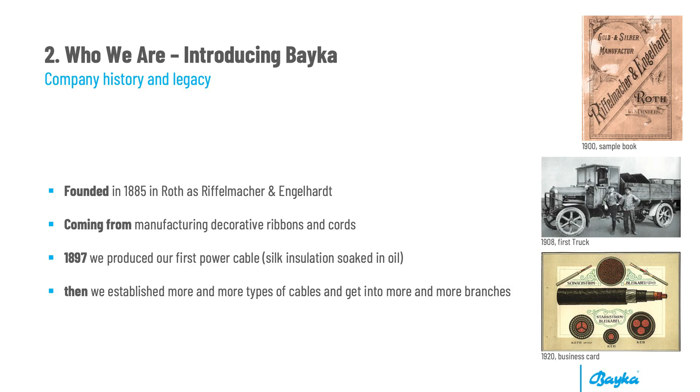We are more than just a cable manufacturer. We provide a wide portfolio of cable solutions, from standard power and communication cables to highly specialized designs tailored to the most demanding environments. Our cables are the invisible backbone of many industries, from powering urban infrastructures and renewable energy projects to enabling safe railway operations and ensuring reliable data communication.

In 2024, we were nominated by Deutsche Bahn AG as one of the top 3 suppliers in the infrastructure sector. We prevailed against 22,000 other suppliers for Deutsche Bahn.

In which markets are we active? What trends are driven there, and why do these markets need us? Energy utilities: without reliable cables, the energy transition cannot happen. Railways and transport: every safe train journey depends on kilometers of reliable cables, often hidden beneath the tracks. Infrastructure and industry: built to last for decades with our cables. Data and communications: enabling the digital era through secure and high-speed cable solutions.

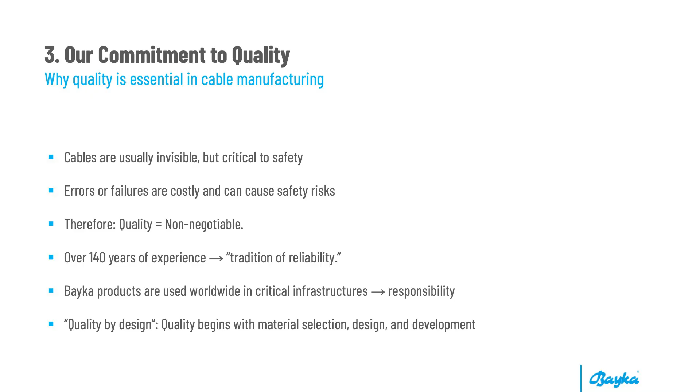We are DIN EN ISO 9001, 14001, and 50001 certified. Furthermore, Bayka employees adhere to ISO 45001, and we fulfill a mass of additional standards and regulations on the customer side.

We don't just test at the end of production. Quality assurance at Bayka is a continuous process, starting from incoming goods inspection through in-line monitoring during production to extensive final testing. But ensuring quality does not stop with standards and processes, it requires rigorous testing, and this is where modern equipment such as Memmert precision devices comes into play.

A cable is only as good as the conditions it can withstand, and each year we perform thousands of hours of testing to ensure compliance and durability. Every test method shows that cable quality is not just claimed but proven.

Cables have a lifetime of more than 30 years in some cases. Temperature is the biggest driver of material aging. Thermal aging tests are the backbone of lifetime prediction for cable, and Memmert devices make these tests repeatable and trustworthy. Memmert stands for absolute reliability and even temperature distribution. Some ovens have been running since 1988 at Bayka without any failures, proof of precision and durability.

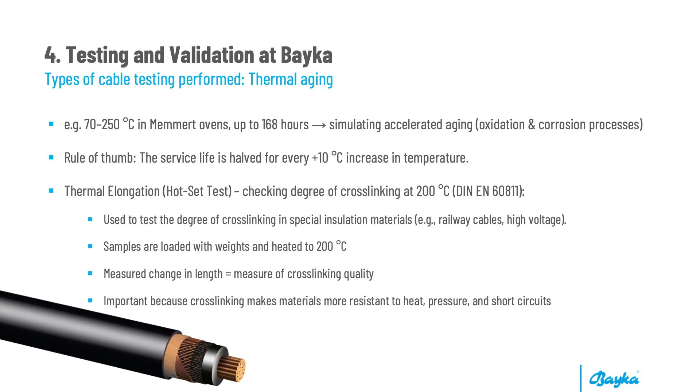Cables are often exposed to moisture fluctuations and microorganisms for decades, for example in tunnels, in the ground, or in buildings. Humidity and climate resistance tests ensure that cables remain functional and safe, even in the most challenging environments, with Memmert technology safeguarding the process. Precise temperature and humidity control and high repeatability of tests are very important. Without Memmert, such precise control of service life would not be possible.

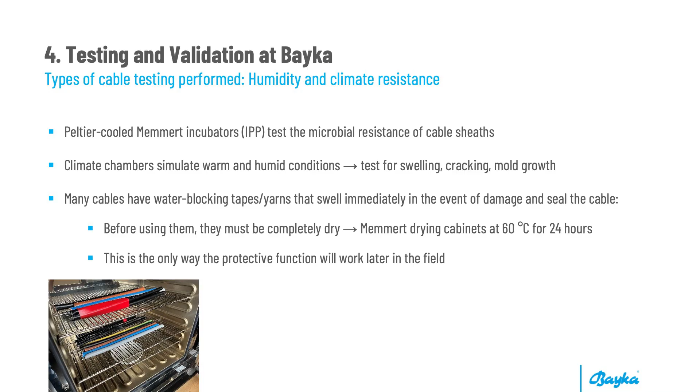During operation, cables are exposed not only to heat and moisture, but also to mechanical stress and electrical strain. Mechanical and electrical tests prove that Bayka cables are not just safe in theory, but robust in real-world applications, backed by reliable test equipment from Memmert. Heating and climate chambers provide stable test conditions for many of these tests. They ensure standard compliant results and facilitate certification.

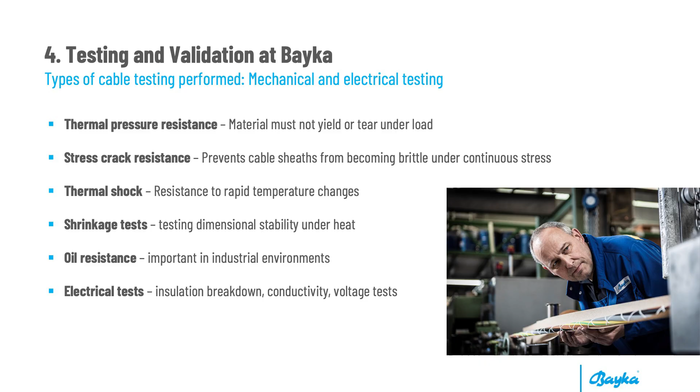At Bayka, testing is not a single step at the end of production. It's part of the entire product lifecycle, from the very first material samples through prototype development to final certification and release. Testing ensures our product meets the highest safety and performance standards. This integrated approach not only accelerates innovation, but also reduces risk and ensures that every cable leaving our factory can be trusted in its critical application, whether in energy infrastructure or communication networks.

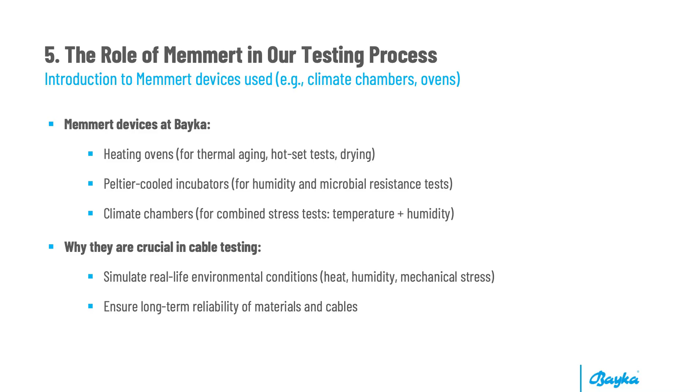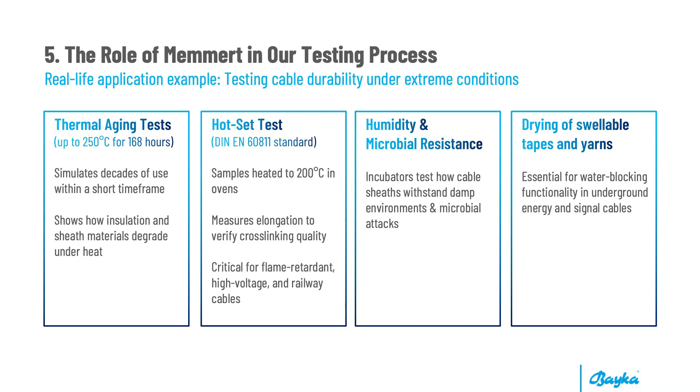Memmert devices like heating ovens, incubators, and climate chambers are integrated across R&D, quality assurance, and production testing. They are not just supportive, but essential in Bayka's testing workflow. These examples prove that Memmert devices enable Bayka to replicate real-world stress scenarios in a controlled, standardized way.

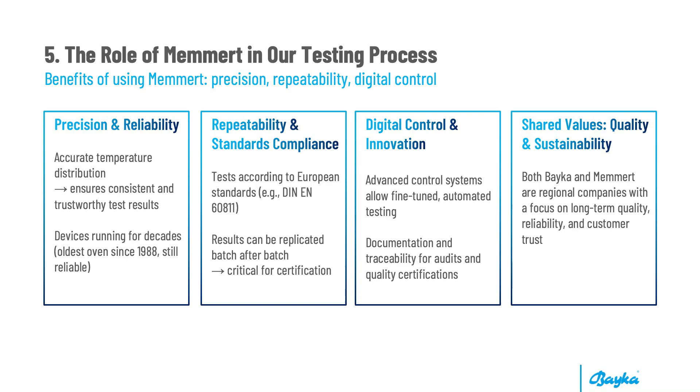Here you see some of the uses of the Memmert items in precision and repeatable digital control. By using modern equipment such as Memmert's climate chambers and ovens, we significantly improve both efficiency and reliability. Automated test cycles and digital controls reduce manual effort, while precise temperature and humidity control ensures consistent, reproducible results. This allows us to detect weakness earlier, shorten development cycles, and ultimately bring robust, reliable products to market faster.

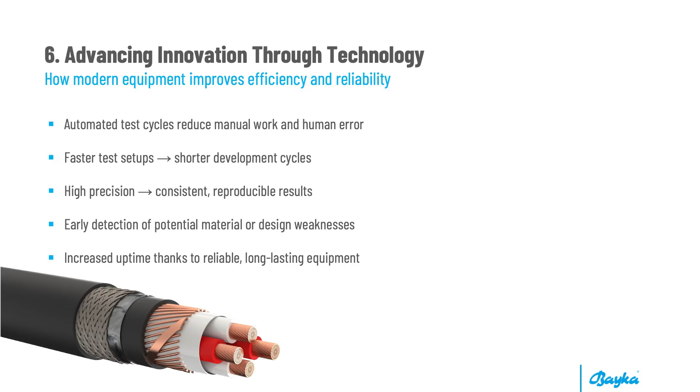Testing is not just about running experiments, it's about data. With modern equipment, every test result is logged and integrated into our quality assurance processes. This ensures full traceability from raw materials to finished cables. It also provides valuable feedback for our R&D teams, enabling continuous improvement. At the same time, it supports compliance with industry standards and customer-specific requirements, strengthening our position as a trusted supplier.

Innovation also means responsibility. By ensuring long-lasting product quality through testing, we help reduce the need for replacements and save resources. At the same time, Memmert's energy-efficient devices contribute to reducing our carbon footprint. Transparent and reliable test results build customer confidence, while our regional partnerships highlight Bayka's commitment to sustainability and long-term responsibility.

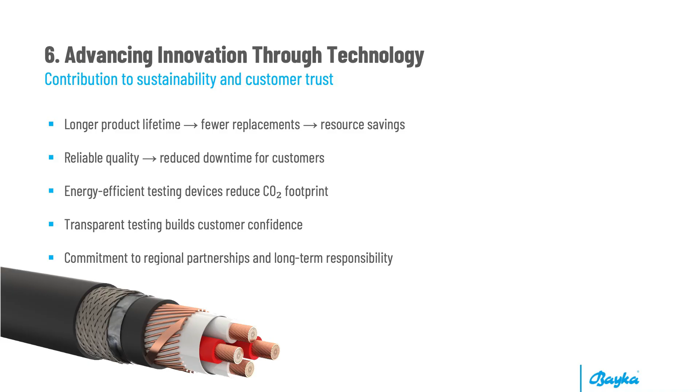To summarize, Bayka is a company where tradition meets innovation, delivering high-performance cable solutions for energy, railways, infrastructure, and communication networks. Our strong commitment to quality is the foundation of everything we do. Every product is rigorously tested, validated, and certified. With Memmert's advanced testing equipment, we ensure precision, reliability, and efficiency, enabling us to continuously improve and innovate. Testing is not just a technical step. It is the key to building sustainability and long-term customer trust. Bayka is ready to power the future, and through our partnership with trusted technology providers like Memmert, we will continue to deliver reliable solutions for tomorrow's challenges.

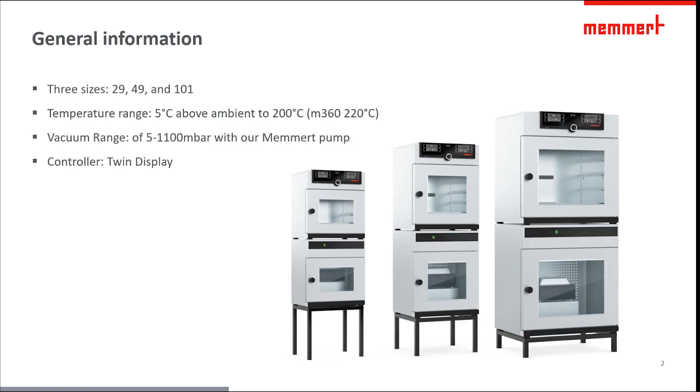The unit, as you see in the image, has our top section as the vacuum oven, followed by our pump module, and the pump sits inside, which allows for a bit more of a quiet mode when using the unit, and then the stand.

Beautiful vacuum oven technology. Our speed-controlled vacuum pump, which is optional, the customer can use, or they can use their own pump if needed. Our pump will allow the customer to save up to 70% in energy. Separately adjustable, all-around heated thermos shelves, which are very unique to our unit.

Internally, the air is actually not heated in our vacuum pump, that's used just for the vacuum. The heat comes from the surface of our shelves, and it's uniform all around the shelf. With our T5 option, you can introduce alternative gases and fresh air to enhance the drying process inside the chamber.

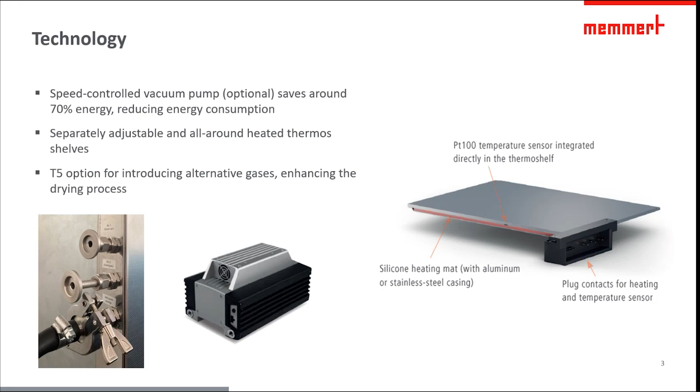Applications: bubble-free fusing and curing of potting compounds, crack-free drying of potting compounds, oxidation-free storage for maintaining a pressure of 5 MBAR and preventing oxygen contact. And lastly, which is the most popular, gentle drying of electronic components without risk of damage through high temperature.

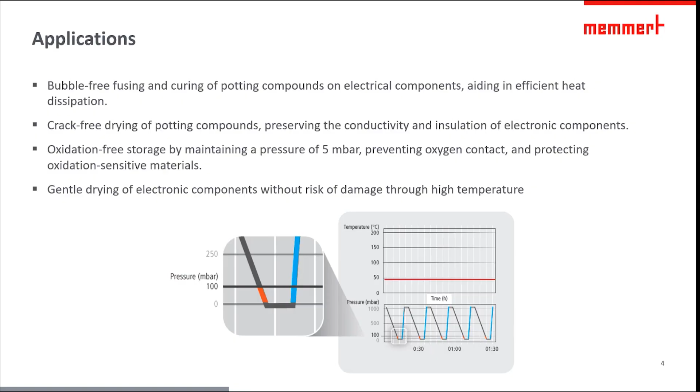Next, I will introduce our drying universal ovens. They come in two formats: your natural convection oven, and our forced air circulation oven. Both come in 9 model sizes from 32 liters all the way to above 1,000 liters. You can get both units with our single display or our twin display controller, which allows for more programming as well as data logging. Temperature ranges from 5 degrees Celsius above ambient all the way to 300 degrees Celsius, with all-around heating on all 4 sides for excellent temperature uniformity.

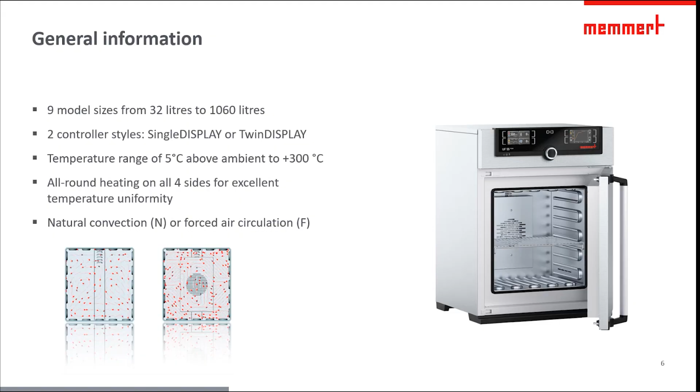What makes our oven stand out from every other oven in the market is how our heat exchange happens. The unit allows fresh air to come in, be preheated into the chamber, and then flow all around the entirely sealed stainless steel interior of the oven, which allows for the best temperature uniformity inside the chamber.

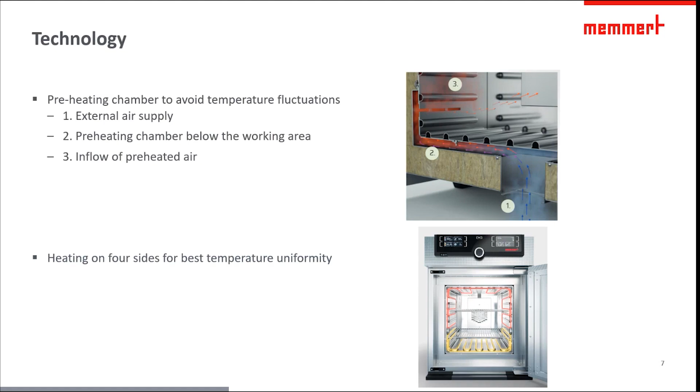Applications, like we know already thanks to Mr. Sorga: cable aging, ideal for testing and aging cables with precise temperature control and high heat output. And our forced drying ovens are used all over the world for efficiently removing water residues with a powerful fan and a fully openable exhaust air flap.

And lastly, our humidity chamber, the HCP unit. It comes in 4 model sizes: 56, 107, 156, all the way to 241 liters. It only comes with our twin display, which allows the customer to not only program the unit but also do data logging. The temperature range for this unit is 18 degrees Celsius up to 90 degrees Celsius.

Relative humidity is digitally controlled. It has an external distilled water tank, and the humidification and dehumidification can range from 20 all the way to 95% relative humidity. In this chamber, all 6 sides are completely and uniformly heated, including the inner glass door, to avoid any kind of condensation inside the unit.

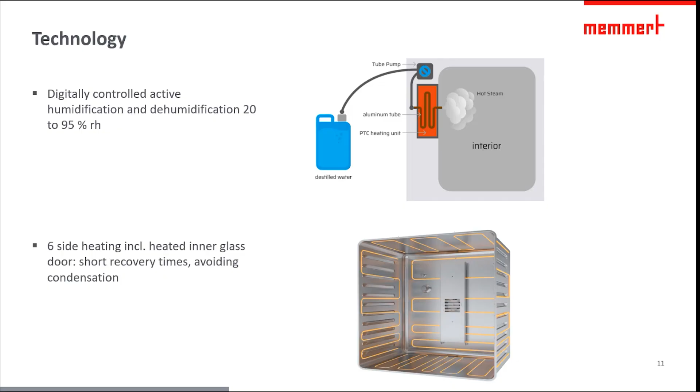Perfect for multiple applications, but one that is very popular is the 85/85 stress test: 85 degrees Celsius, 85% relative humidity, to ensure electronic components withstand extreme conditions. So if a customer is looking for a high temperature range as well as high relative humidity for long testing, the HCP unit is the unit for you.

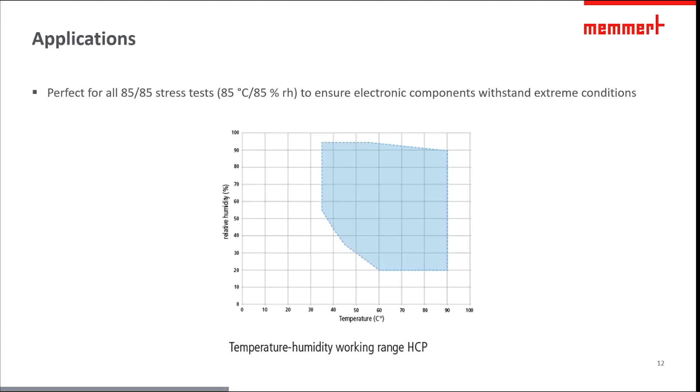Now, to give you a little history background on the Memmert brand: the Memmert family has been developing and perfecting the marriage of heat and humidity inside a chamber since 1933. Today, in the 3rd generation, the lady in the center of the image, Christiane Riefler, commands the most perfect engineering when it comes to all of our units and everything manufactured, not only in Germany, but also in China.

We have over 550 employees, over 40 interns, and multiple departments: marketing, engineering, customization. Their main goal is to make sure that every unit that comes out of our warehouse is 110% perfect.

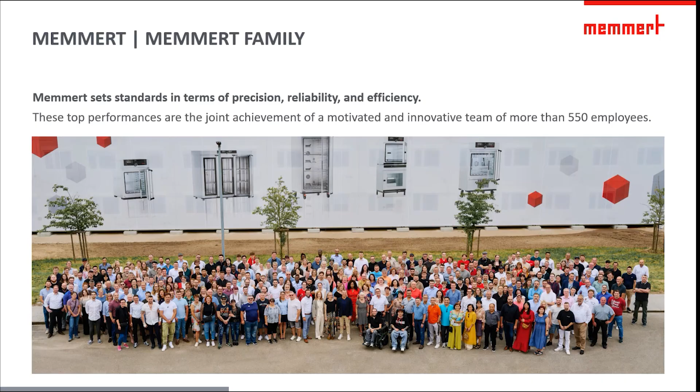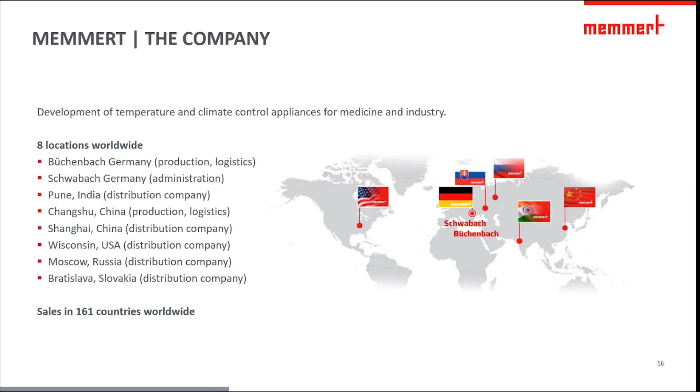You can find our brand in over 8 locations worldwide. Distribution happens in multiple locations throughout the world, but production only happens in Germany and China. Our brand is sold in over 160 countries worldwide today.

Which of course brings us to the US. Just to give you a little history: the Memmert brand has been in the US market since 1987. In 2006, Wisconsin Ovens Distributor was created to be the single source for selling ovens and really the entire Memmert line in the US. In 2021, Memmert made a massive investment in Eagle, Wisconsin, and finally put up a sign bearing our brand here in the US.

Memmert USA focuses on delivering precision-engineered ovens, incubators, and climate chambers designed to ensure reliability, compliance, and consistent performance. We have 14 employees who are passionate about supporting customers with technical expertise, responsive service, and tailored solutions.

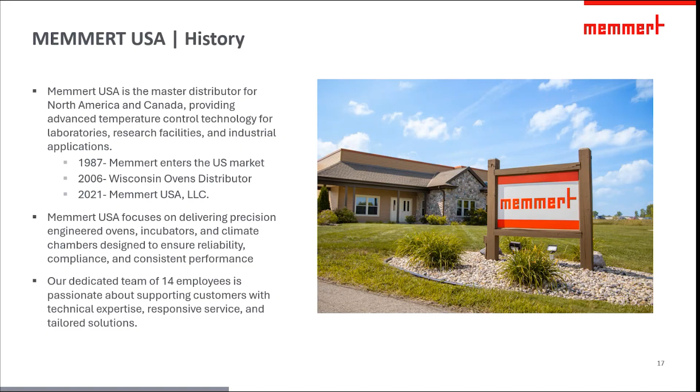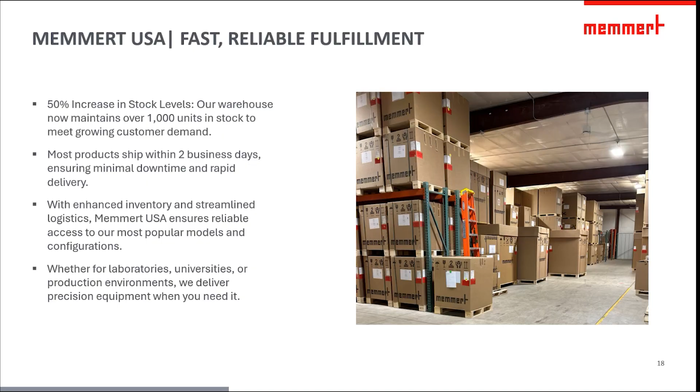Our goal is to have product in hand to make sure that we meet our customer needs as fast as possible. We've increased our stock levels by 50%. Our warehouse now maintains over 1,000 units in stock. Most products ship in 2 business days. With an enhanced inventory and streamlined logistics, Memmert USA ensures reliable access to our most popular models and configurations. Whether for laboratories, university, or production environments, we deliver precision equipment when you need it.

Each device is individually tested for performance. Each Memmert chamber is individually calibrated. Memmert products comply with the new DIN 12880 2007 guideline for stricter testing of temperature uniformity. Our production process is analyzed on a yearly basis to make sure that whatever the customer is receiving is at optimal working precision.